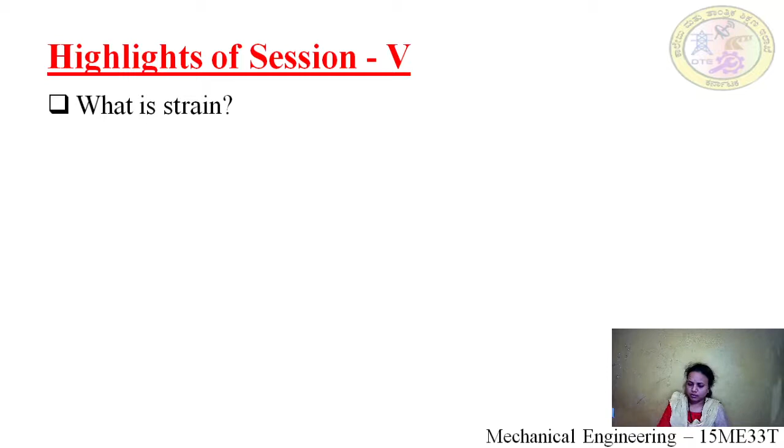Before we go to the 6th session, let's review what we saw in session 5. First, what is strain? Strain is how much an object is stretched or deformed. How does strain occur in an object? When a force is applied on an object, it will either expand or contract. If a tensile force is applied, it gets stretched. If a compressive force is applied, it is deformed. This is strain.

Next we saw what are strain gauges and measurement of strain. Strain gauges are devices used to measure deformation in an object. A strain gauge consists of a single wire wound back and forth, connected at two ends to the object where strain is to be measured. Whenever the object stretches due to applied force, the strain wire also gets stretched, so the resistivity of the wire changes, and that resistivity is used to measure the strain.

Next we saw the purpose of strain gauges. The first purpose is to determine the state of strain at an existing point on a loaded member, from which we measure the stress at that point. The second purpose is that it acts as a strain sensitive transducer, to measure force, acceleration, and tension on the object.

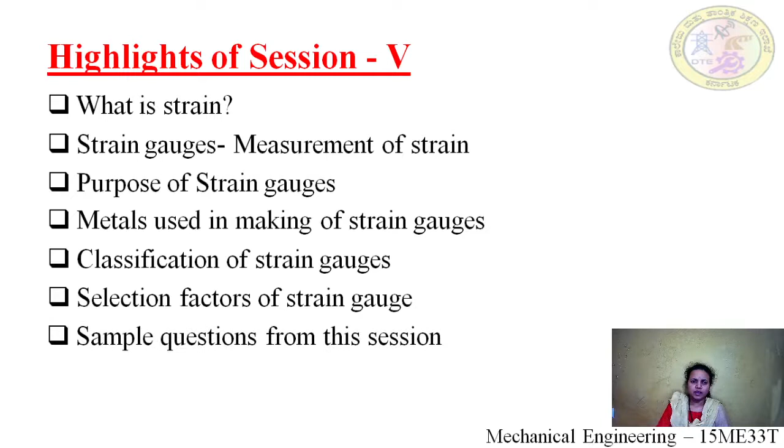And next we saw some of the sample questions from this session.

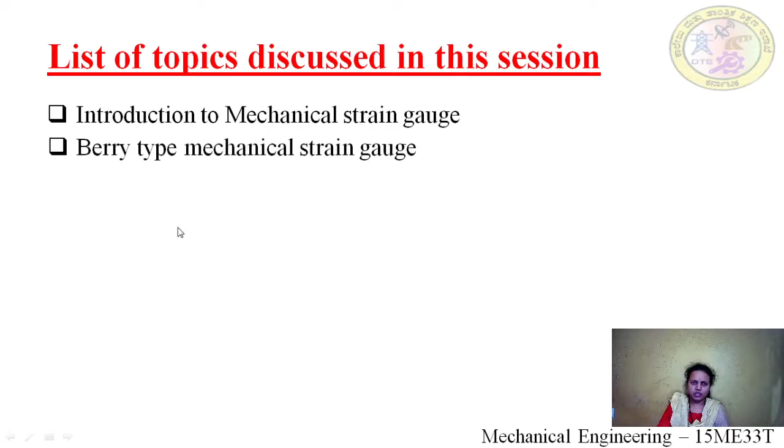Today we are going to discuss: first, one type of strain gauge, the mechanical strain gauge. Next, the Berry type mechanical strain gauge. Then some advantages of the Berry type mechanical strain gauge, followed by its disadvantages, and some applications of the Berry type mechanical strain gauge. Then we shall see some sample questions from this session that may be asked in the end examination.

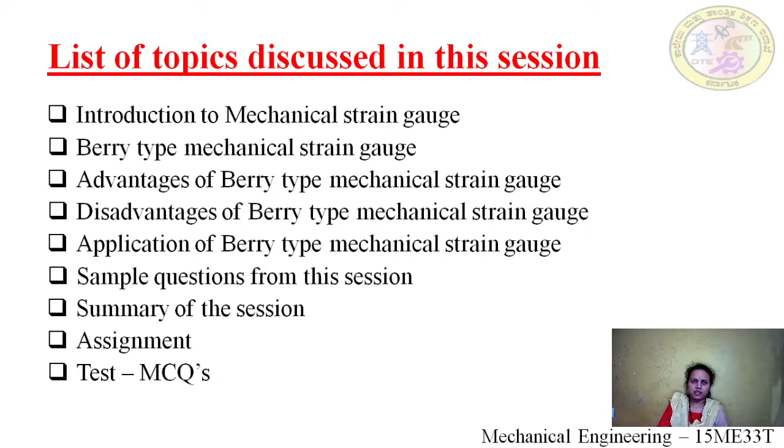Let's start with the first topic of today's session: the mechanical strain gauge. As the name indicates, a mechanical means is used to measure strain. It is also known as extensometer, and it is also known as Berry type strain gauge.

It is used to measure static or gradually varying load conditions, and it is used to determine the length changes in different parts of a structure. Because of the force applied, there will be a change in length, and that change in length is measured through this mechanical strain gauge.

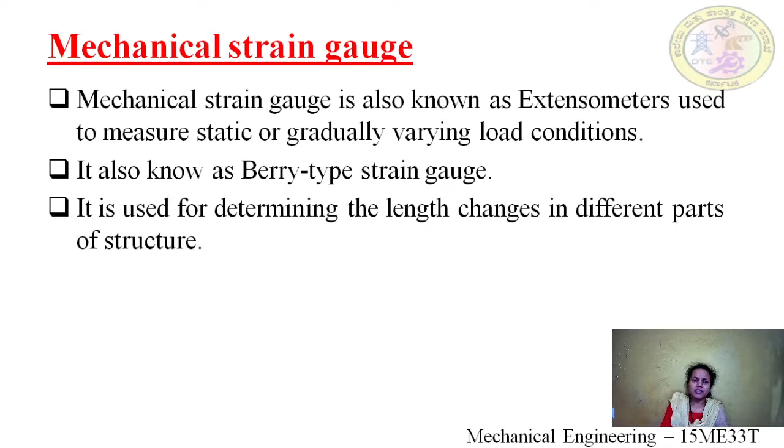The figure shows a Berry type mechanical strain gauge. It consists of, below, the specimen whose strain is to be measured. This is a specimen where we are applying a tensile force to it.

On the specimen, two gauge points are seated: one gauge point and another gauge point. One gauge point is fixed, and the other gauge point is connected to a magnifying lever which gives input to the dial indicator. It is pivoted here, and this point is connected to the magnifying lever, which will give the result to the dial indicator.

Then we receive the reading of how much displacement took place on the specimen. One point is fixed, the other is movable. So whenever a tensile force is applied, there would be a change, and this point will move to one side.

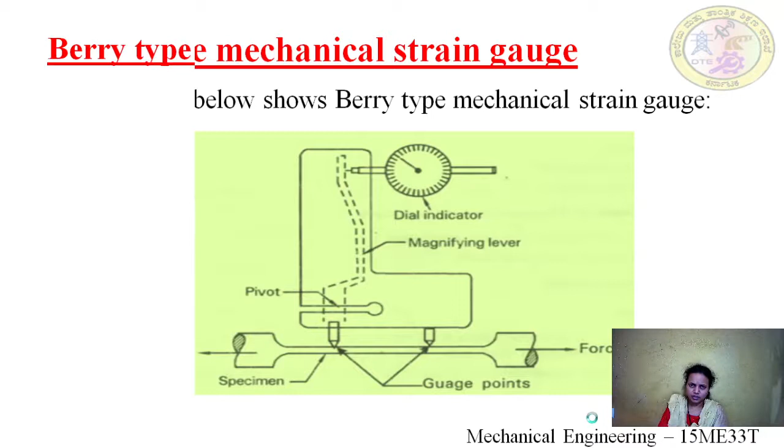So if I apply force, what happens? We can see this movement to one side. As this moves, the magnifying lever will magnify the reading by however much it has moved, and that will be shown in the dial indicator. So directly we get the reading of how much displacement, and by that displacement we are measuring the strain here. This type of strain gauge involves mechanical means for magnification.

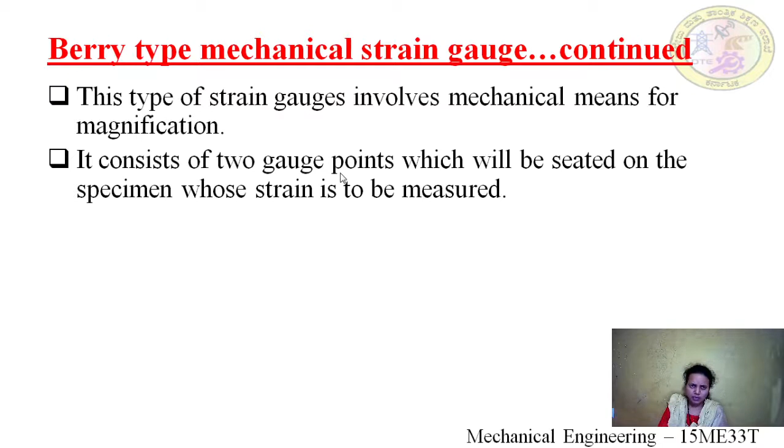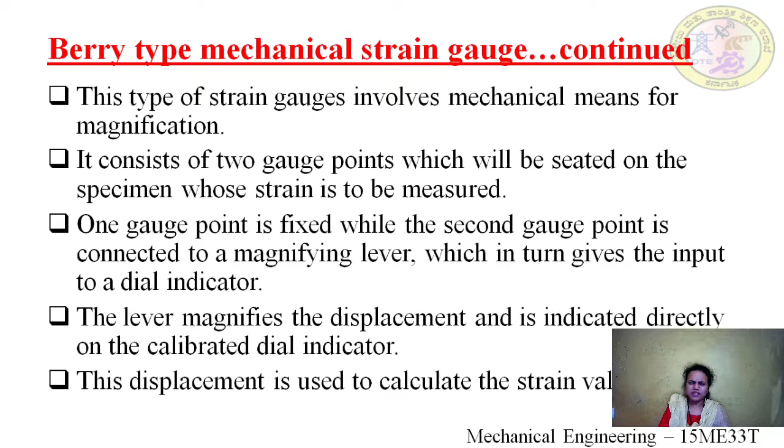It consists of two gauge points seated on the specimen whose strain is to be measured. One is fixed while the second point is connected to a magnifying lever, which in turn gives input to the dial indicator. The work of the lever is to magnify the displacement, which is indicated on the dial indicator. This displacement, how much the length has increased, is used to calculate the strain value. I hope you understood this working principle. It is simple; among all types, the Berry type mechanical strain gauge is the simplest one.

Now we shall see some advantages of the Berry type mechanical strain gauge. Number 1, it has a self-contained magnification system. You can see the magnifying lever is already installed in the Berry type mechanical strain gauge. It doesn't need any extra thing to read out the readings, magnifying or amplifying.

It is already self-installed inside only. The second advantage is no auxiliary equipment is needed here, as in the case of electrical strain gauges, where we use a CPU or other devices to record readings. Here no extra support device or equipment is needed. It is suited for static conditions, compared to other strain gauges.

It is simple in construction and application. Application is very easy, and the construction is also simple. So these are four advantages of the Berry type: number 1, self-contained magnification, already inside the Berry type mechanical strain gauge; second, it doesn't need any extra support equipment as in electrical strain gauges, and it is best suited for static tests; and last, it is simple in construction and application.

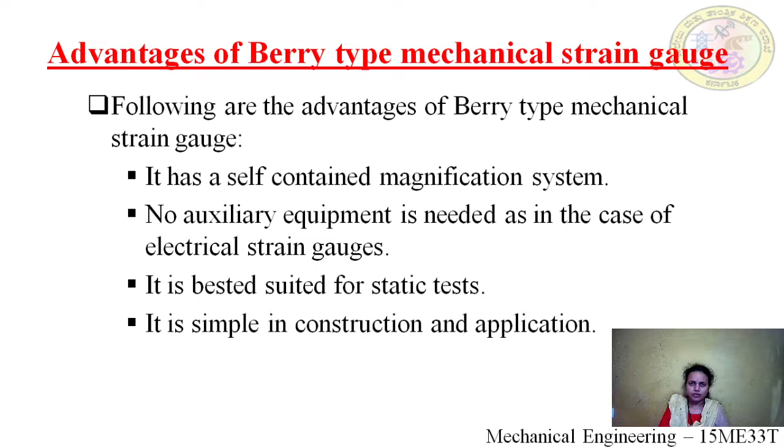Next, we shall see some disadvantages or limitations of the Berry type mechanical strain gauge. Number 1, it has high inertia, meaning high resistance to force from any physical object. Next, it is not suitable for dynamic measurements. As I already said in the advantages, it is suitable for static tests, but not for dynamic measurements, because once a displacement happens, it takes time to get the reading. If it happens suddenly, it takes time, so it can only give static measurements due to its slow response.

Instantly we are not going to get the output at the same time. It takes a little time, so it has a slow response. This is one of the disadvantages of Berry type mechanical strain gauge.

Next, no method is incorporated to record automatically. After the reading, the pointer moves and only then will we know the reading. Till then there is no such record inside the mechanical strain gauge. We have to take the reading, check another specimen, take the reading again, and before the next reading comes, the old reading will be erased. So no method is incorporated to record automatically.

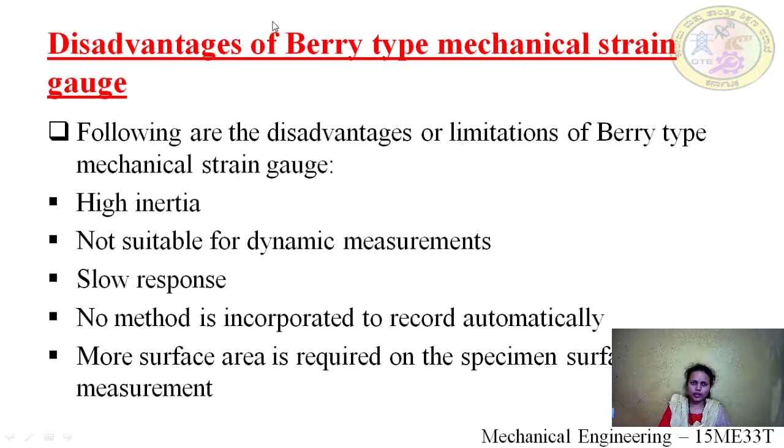Next, application. The Berry type is used maximum in structural applications in civil engineering for long gauge lengths up to 200 mm. So in civil engineering, like dams, tunnels, and constructions such as bridges and tunnels, we are using these strain gauges.

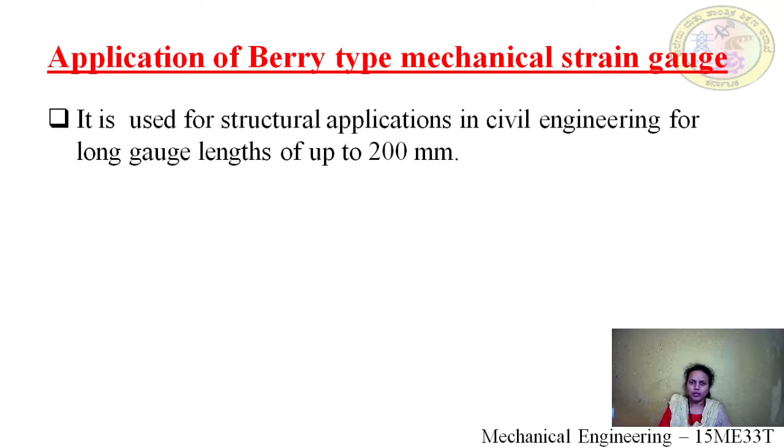Whenever there is a change in the bridges, if overload or overweight is happening, these strain gauges will give a warning so that it can be corrected. Even in railway monitoring, railway rails usually expand and contract in summer, so there would be changes in the length and structure of the rails. We keep strain gauges there to measure the stress at that point, so that if it gives a warning, we can go and correct it.

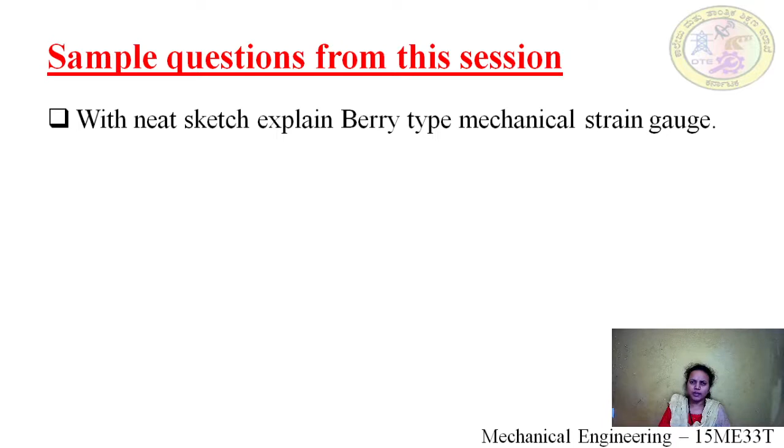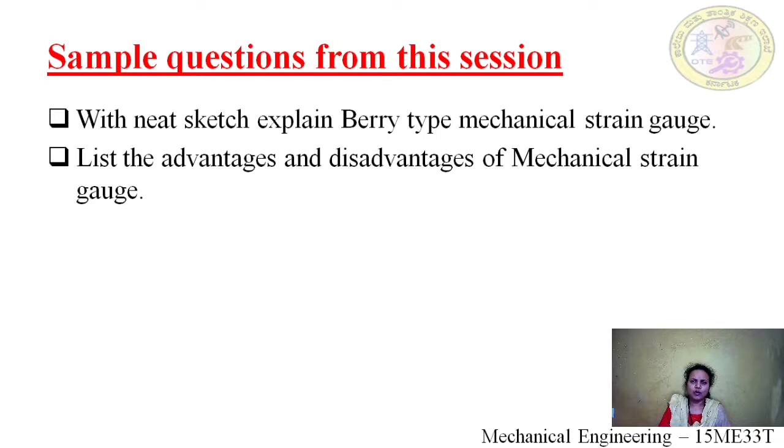We shall see some sample questions from this session. They can ask you to, with a neat sketch, explain Berry type mechanical strain gauge. The next question they can ask is to list the advantages and disadvantages of mechanical strain gauge.

So let's go through what we have learned. First we saw the mechanical strain gauge. What is a mechanical strain gauge? It is also known as Berry type strain gauge or extensometer. Here, mechanical means are used for magnification, and we are measuring the change in displacement of an object where stress or force is applied. So mainly we are measuring the displacement so that we can measure the strain, and later the stress as well.

Next, we saw the Berry type mechanical strain gauge. In this mechanism, we had one specimen, and the Berry type mechanical strain gauge was seated on it. We had 2 gauges: one gauge point was fixed, the other was movable. This gauge point was connected to the magnifying lever, which in turn was connected to the dial indicator. When a tensile force is applied on the specimen, there would be a change in displacement. The gauge point connected to the magnifying lever will move, there will be some displacement, and that is magnified by the magnifying lever, with the reading shown in the dial indicator.

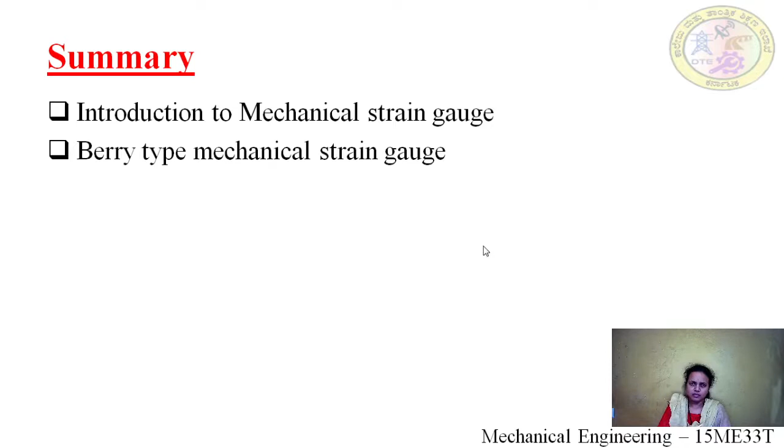It is the simplest way of measuring the strain in the specimen, in an object.

Next, we saw some advantages of Berry type mechanical strain gauge. The first one was that it contains a self-contained magnification system, meaning the magnification system is already installed in it, so it does not need any extra support equipment. No auxiliary equipment is needed, as in the case of electrical strain gauges. Next, it is best suited for static tests, and it is simple in construction and application. It is easy to use, and it is very simple for construction as well.

Next we saw the disadvantages of Berry type mechanical strain gauge. The first one is it has high inertia. The next, it is not suitable for dynamic measurements.

As I already said in advantages, it is best suited for static test, but in disadvantages it does not suit dynamic test. The third is it has slow response. As soon as the displacement occurs, it needs little time for giving the output. Instantly it won't, like in electrical, give the result.

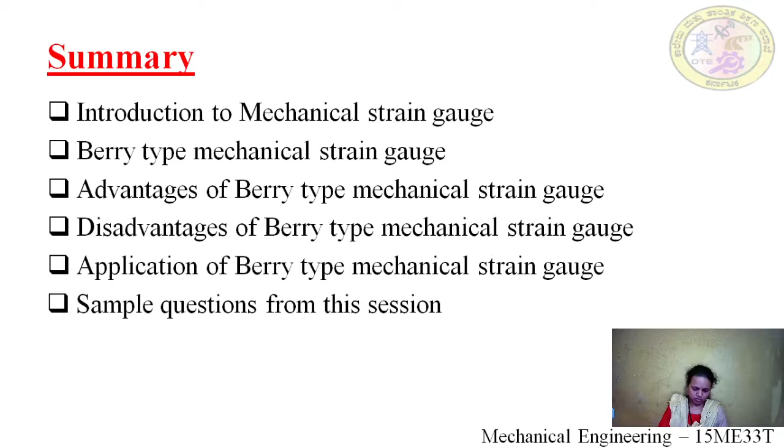Assignment: I have given you to compare electrical strain gauges with mechanical strain gauges. Compare how these are working, where are their applications. Compare both electrical strain gauges and mechanical strain gauges.

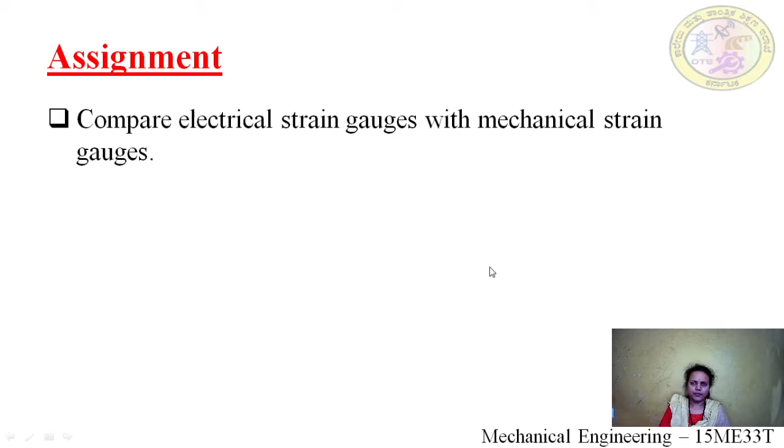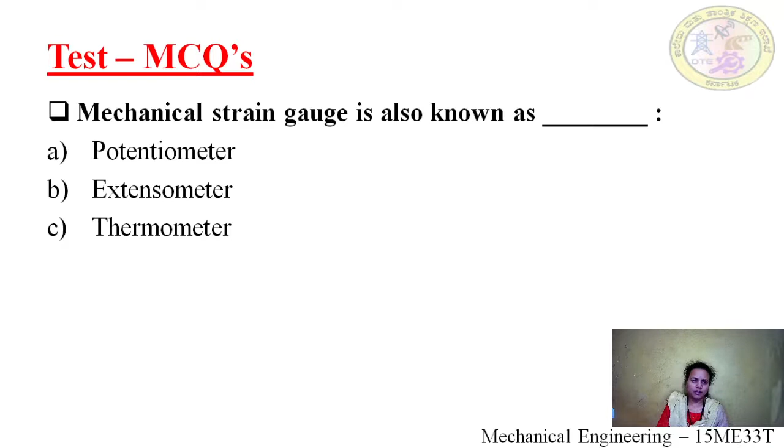The first question is: mechanical strain gauge is also known as. Can you guess the answer before I give the options? Option A, potentiometer. Option B, extensometer. Option C, thermometer. Option D, wattmeter. Can you guess the answer? What do we call mechanical strain gauge? Write down the answer.

The solution is B, extensometer. So mechanical strain gauge is also known as extensometer.

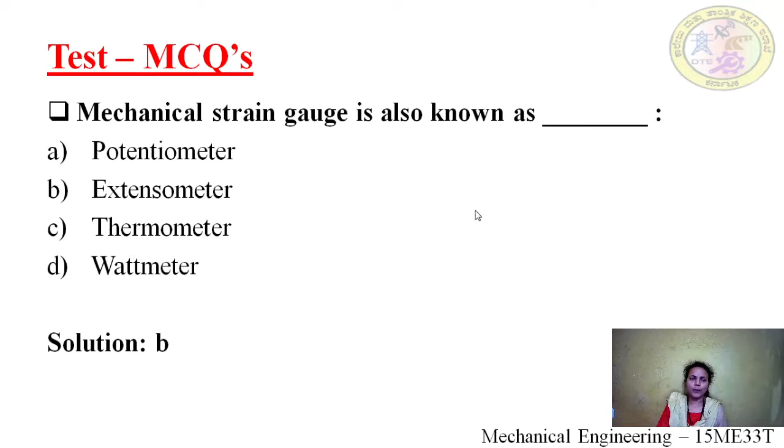We'll go for the second question. Dash is used for magnification in Berry type strain gauge. For magnification, what are we using to magnify the reading in Berry type strain gauge? Option A, gauge points. Option B, pivot. Option C, lever. Option D, dial indicator. For magnification in Berry type strain gauge, which of the following is used? Can you guess?

The solution is C, lever. Lever is used for magnification in Berry type strain gauge. I think you all wrote the right answer.

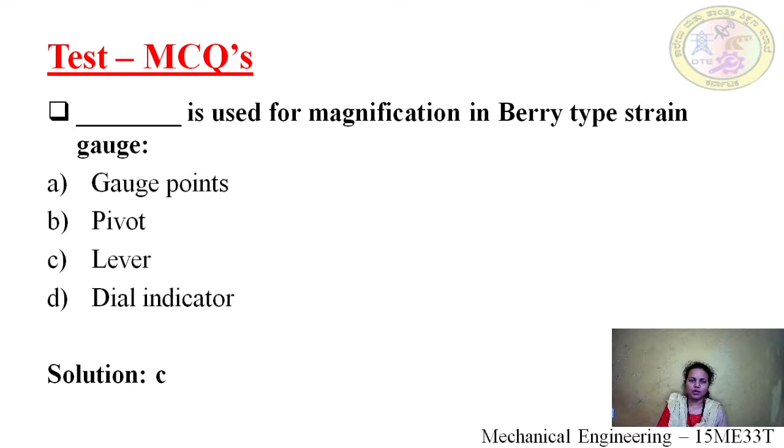We'll go for the third question. Mark true or false: Berry type strain gauge is suitable for dynamic measurements. Option A, true. Option B, false. For which type of measurement is it suitable? Berry type strain gauge is suitable for dynamic measurements - is it true or false? Can you guess the answer?

The solution is B, false. Berry type is not suitable for dynamic measurements. Berry type is suitable for static measurements. This is one of the disadvantages. We can say Berry type is not suitable for dynamic measurements; it is suitable for only static measurements.

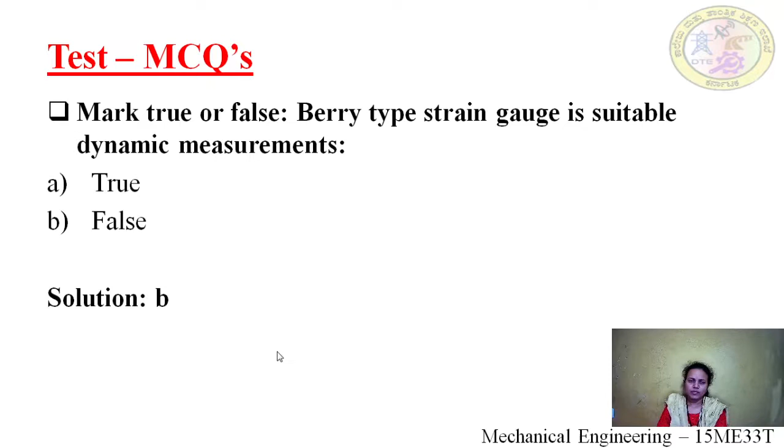Let's go for the next question. Mark true or false: Berry type strain gauge records readings automatically. Option A, true. Option B, false. Do we have anything to record readings automatically in Berry type strain gauge? Can you guess? Berry type strain gauge records readings automatically - is it true or false?

The solution is B, false. Berry type strain gauge is not incorporated with any method to record readings automatically. It does not have any record of readings automatically. It is false.

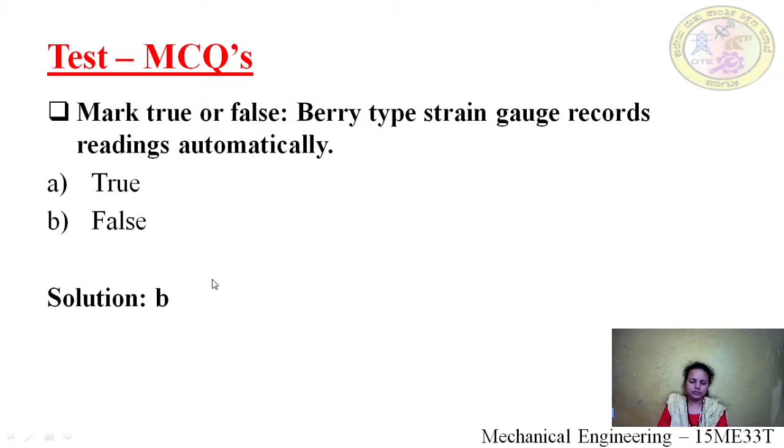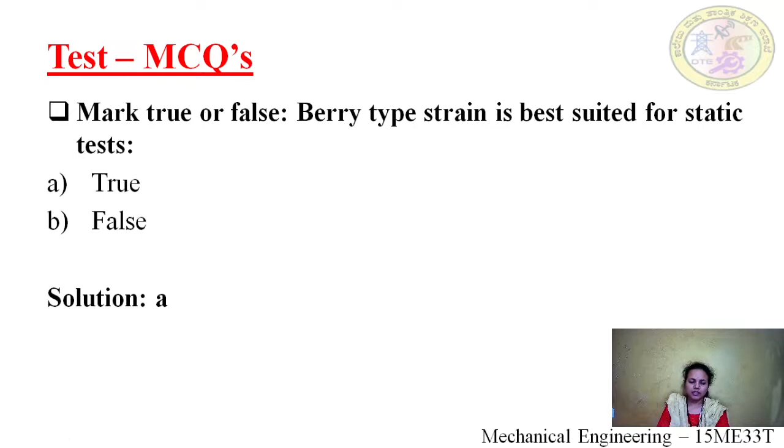I would like to end the session with a quote from Martin Luther King Jr. He says, 'Intelligence plus character is a goal of true education.' Thank you.